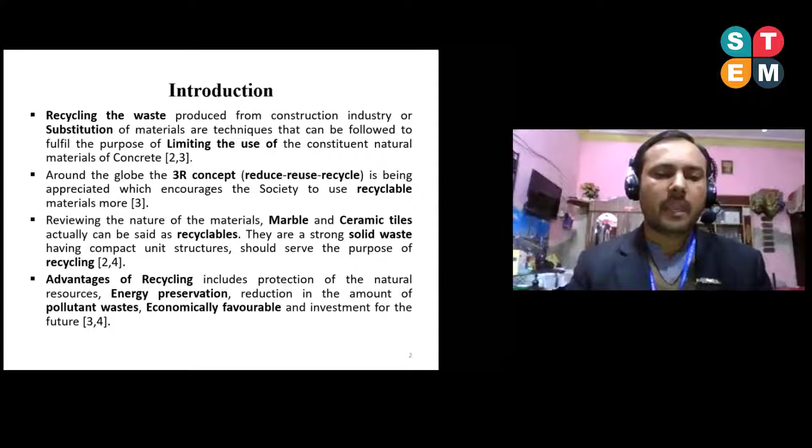Reviewing the nature of the material, marble and ceramic tile can be said to be recyclable materials. They are strong solid waste having a compact unit structure, which should serve the purpose of recycling. Advantages of recycling include protection of natural resources, energy preservation, reduction in the amount of pollutant waste, economic favorability, and investment for the future.

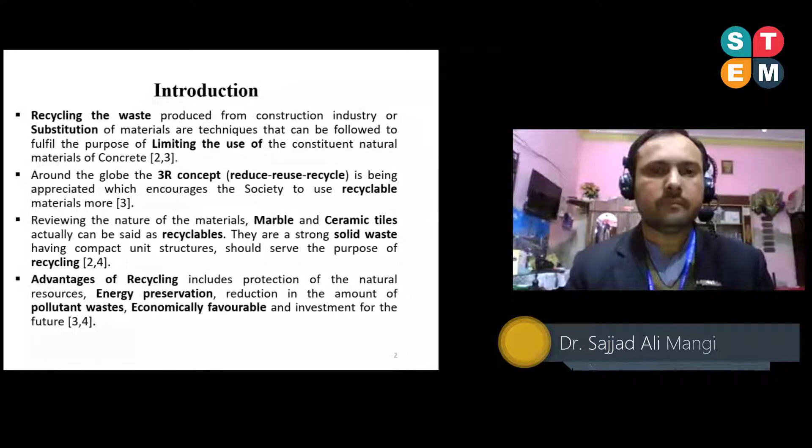What is waste marble? Waste marble is from one of the world's largest yields of natural stone, which is 50% of the total yield of natural stone around the globe. Particularly in Pakistan, Khyber Pakhtunkhwa province possesses huge marble reservoirs. 20 to 30% of marble blocks convert into powder or dust throughout its processing. This waste, on interaction with the soil, affects the soil properties and alters it negatively by making the land barren.

And what is ceramic tile? During ceramic tile production, studies have shown that about 30% of material turns into waste, and currently it is not beneficially utilized. Particularly, construction and demolition waste contributes the highest percentage of waste worldwide, around 75%. If tile aggregates are replaced with coarse aggregates in concrete, it yields very useful results, reduces pollution, and fits economically as well in the construction industry.

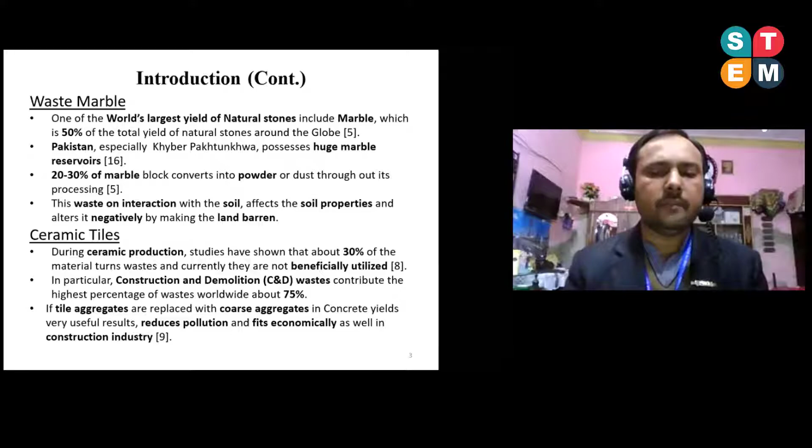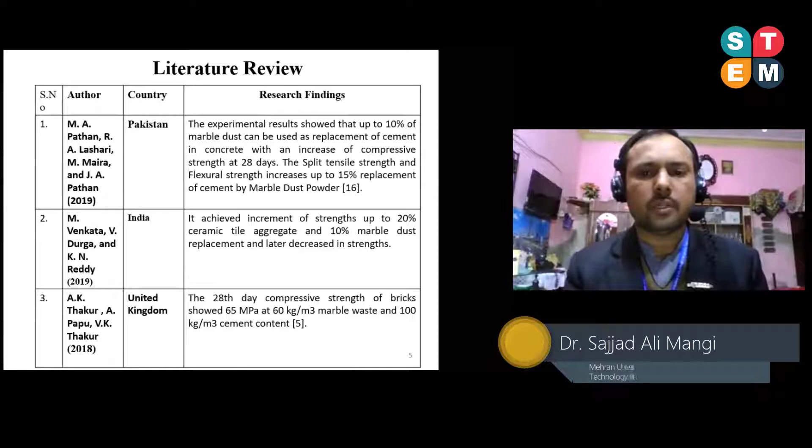This is the literature review which is already available, and there are many research studies conducted on waste marble and waste marble dust, and on tile waste. But there is no research reported which uses a combination of these two materials.

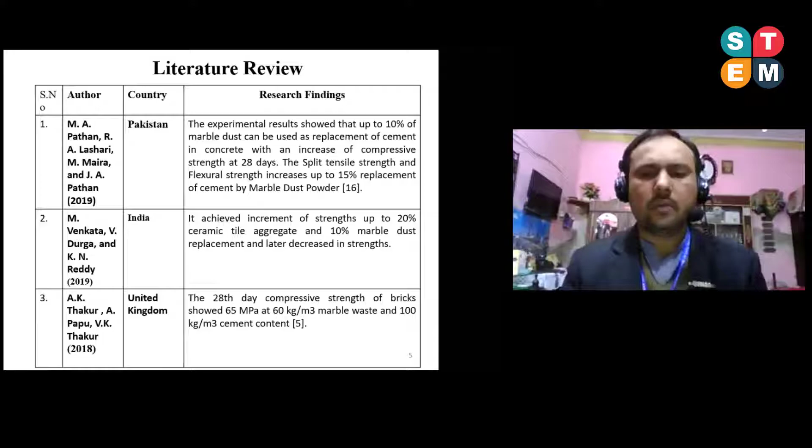In Pakistan in 2019, a research was conducted which shows that 10% is an optimum replacement. In India in 2019, research also shows 10% marble dust is optimum. A 2018 research in the United Kingdom also shows good strength performance with waste materials. A 2018 research in South Africa also reported that waste materials can be utilized and have a good impact on concrete strength.

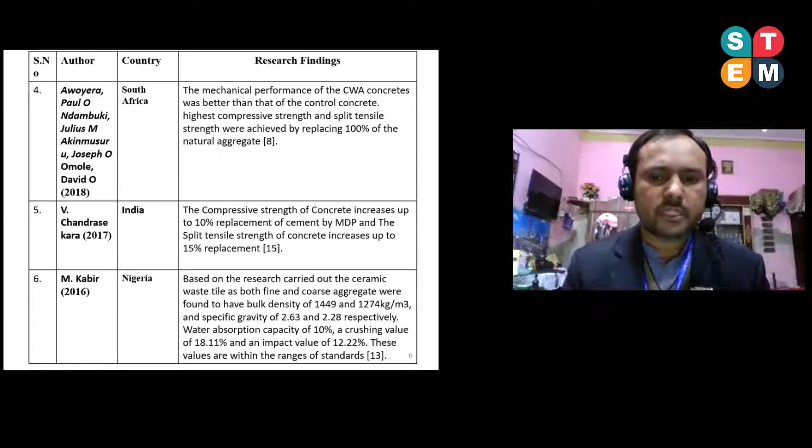Another research in India, reported in 2017, also shows that 10% replacement is optimum. And last but not least, research from Nigeria in 2016 also reported a 10% replacement optimum. So based on the previous research, this study was designed.

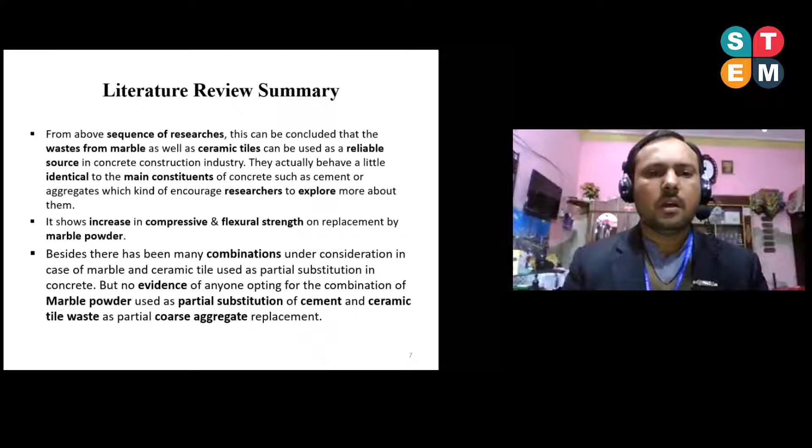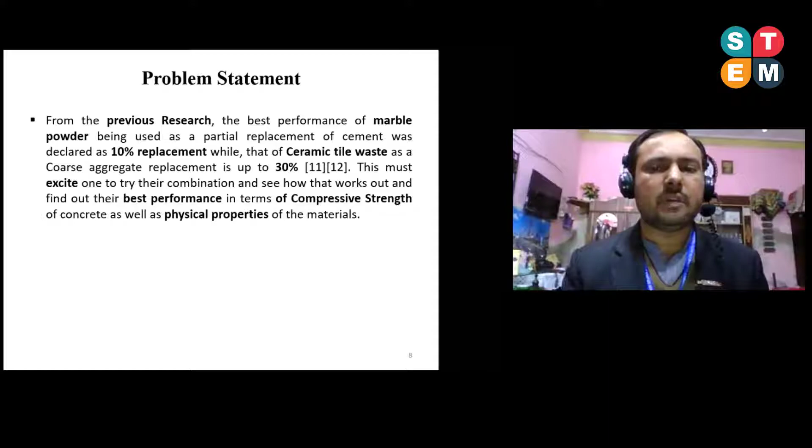What is the problem? From previous research, the best performance of marble powder used as a partial replacement of cement was declared at 10% replacement, while that of ceramic tile waste as a coarse aggregate replacement is up to 30%. This must excite one to try this combination and see how it works out, and find the best performance in terms of compressive strength of the concrete as well as the physical properties of the materials.

Based on the literature review and problem statement, the aims and objectives were designed. The aim of this study is to achieve sustainable and green concrete using waste materials like marble and tile.

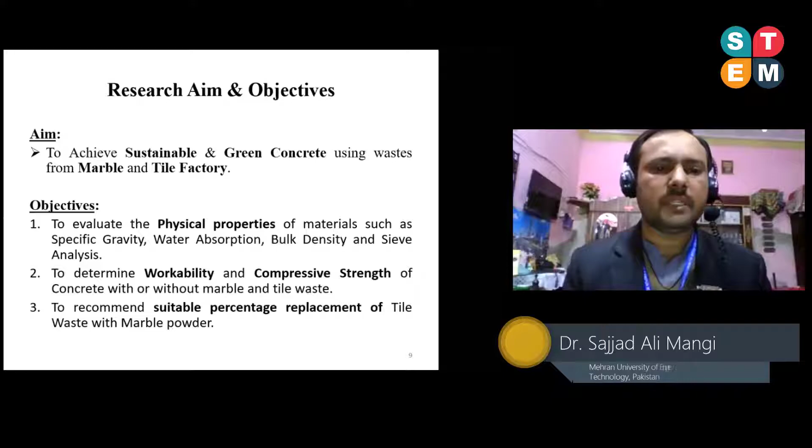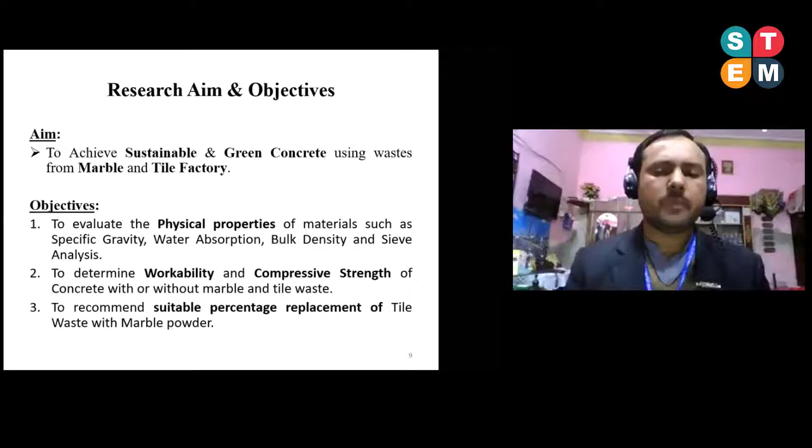Objective 1: to evaluate the physical properties of materials such as specific gravity, water absorption, bulk density, and sieve analysis. Objective 2: to determine the workability and compressive strength of concrete with and without marble. Objective 3: to recommend a suitable percentage replacement of tile waste with marble powder.

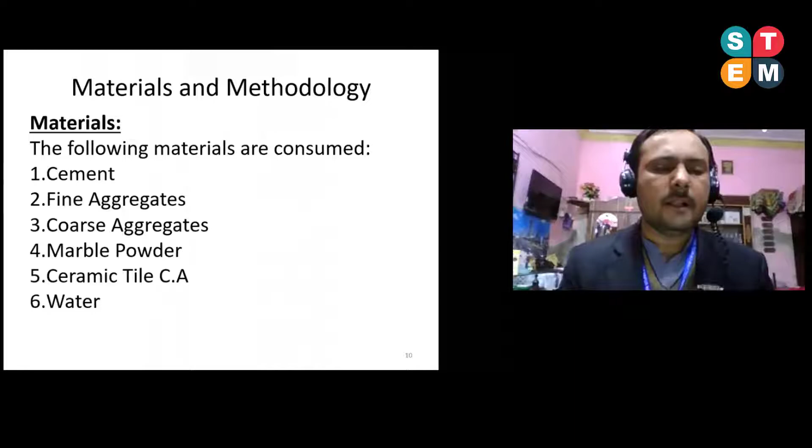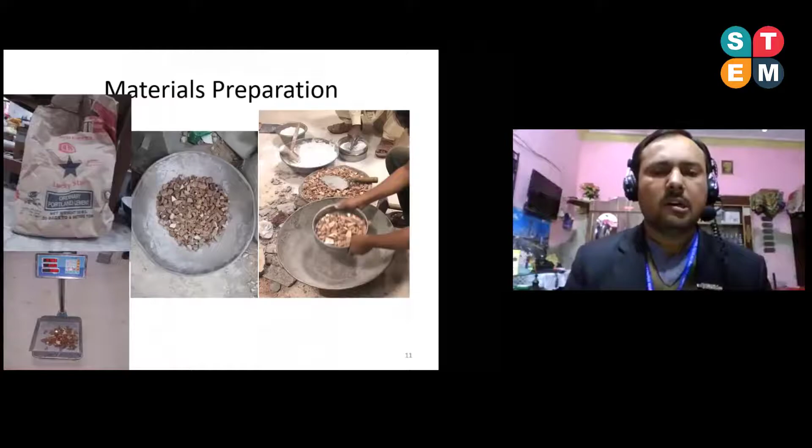Materials used during the experimental work: cement, fine aggregate, coarse aggregates, marble powder, ceramic tile as a coarse aggregate, and water. These are snapshots taken during the experimental work. You can see the tile waste, which is prepared like a coarse aggregate.

Equipment used during the experimental work: cylinders of size 150mm in diameter and 300mm in length, concrete mixer, slump cone, weight balance, hammer, electric vibrator, sieves, oven, and compressive test machine.

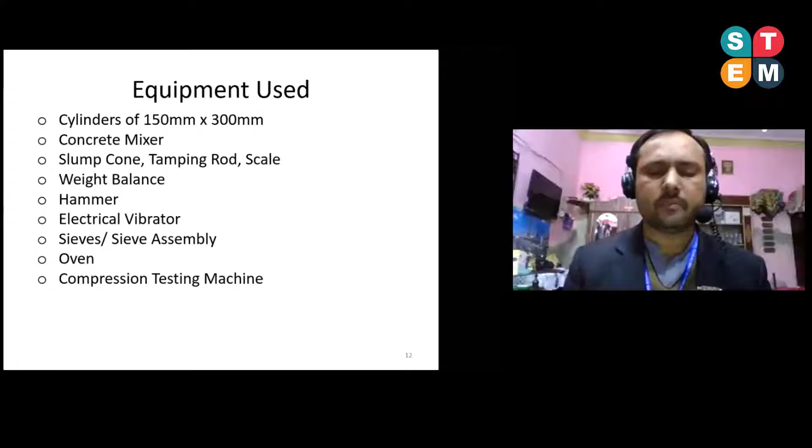Methodology: based on the literature review, we initially decided to combine these two waste materials - preparation of research strategy, selection and testing of suitable materials for the development strategy, and then preparation of samples, which were put in water for a designated period of time for curing.

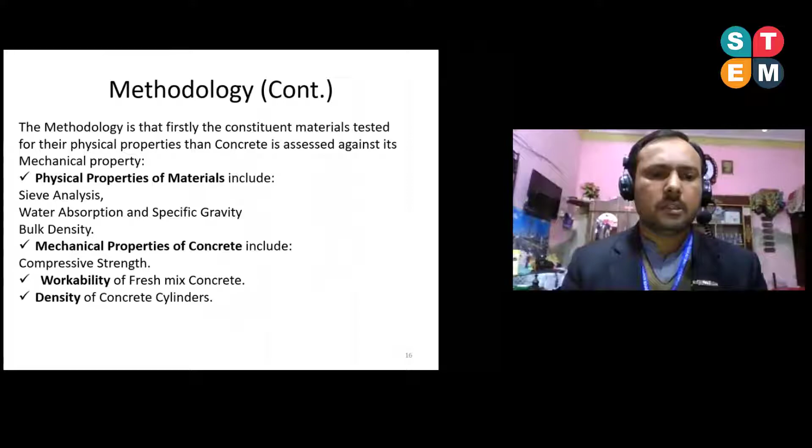These are the methodology details, and in this study we prepared around 24 samples. Here you can see there is some coding: C1, C2, C3, and C4. C1 represents the control mix, meaning without any waste material, which can be compared with the recyclable materials.

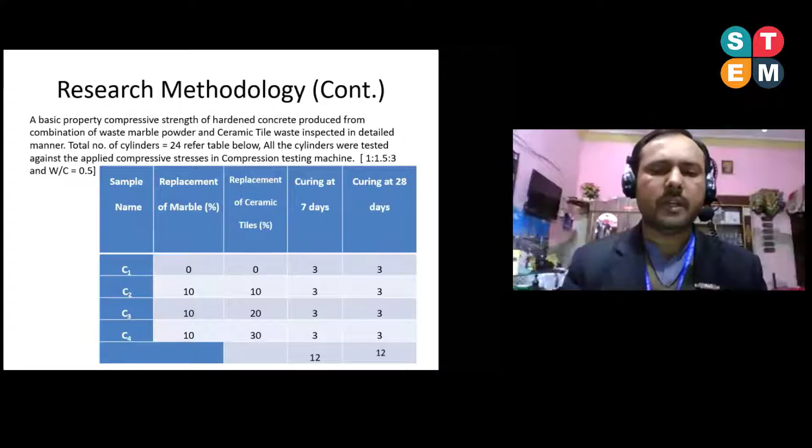C2 represents the 10% marble powder. In this study, we fixed the marble powder as a 10% replacement, then we vary the ceramic tile waste by 10%, 20%, and 30%. Three samples were prepared for each, with a total of 12 samples at 7 days and 12 samples at 28 days tested.

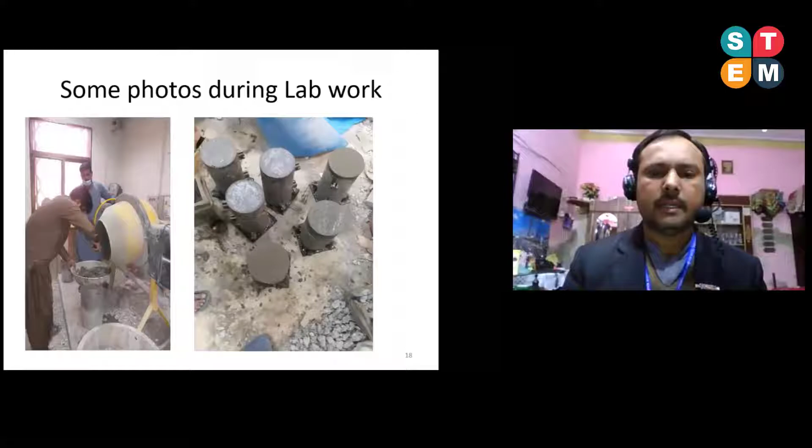These are some snapshots during the lab work, and these are the cylinders that were casted.

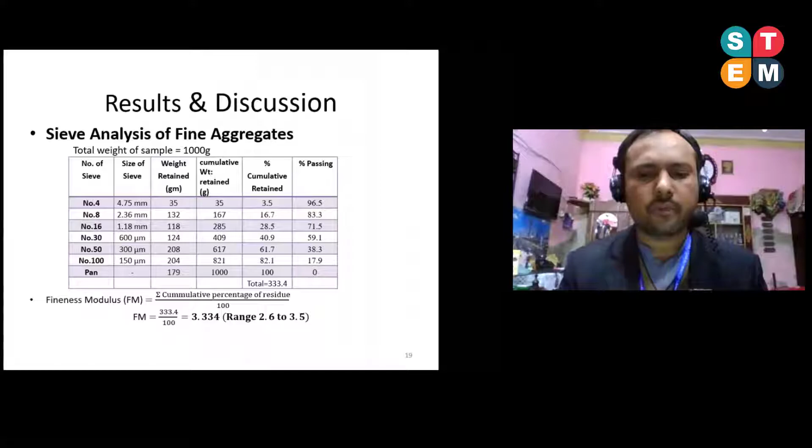These are some results of sieve analysis. According to British standards, these tests were conducted, and sieve analysis of fine aggregate was found quite good within the range of 2.6 to 3.5. The result of our fine aggregate is 3.33 fineness modulus. These are the sieve analysis results of coarse aggregate used in this study.

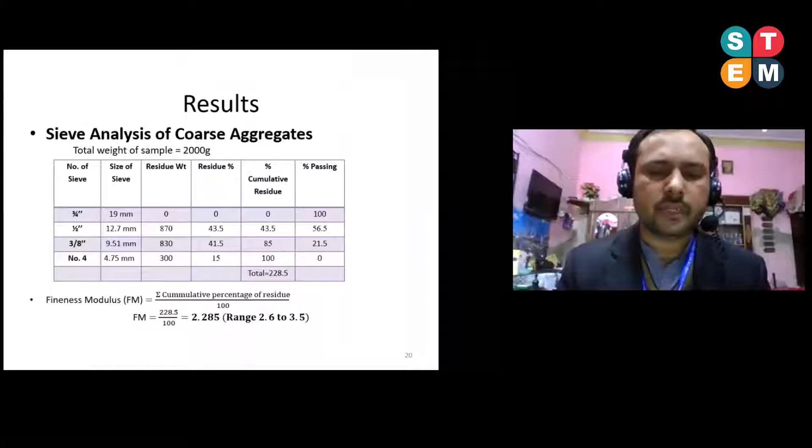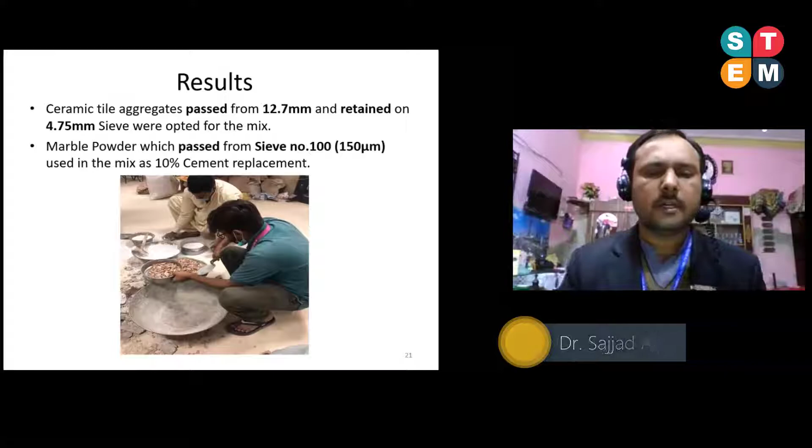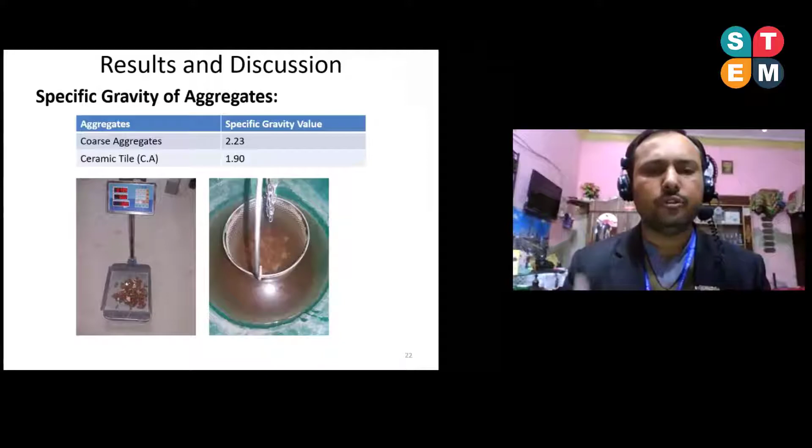These tests were conducted as a specific gravity test, and the specific gravity of coarse aggregate was found to be 2.23, and the specific gravity of ceramic tile was found to be 1.90. This shows that the specific gravity of ceramic tile coarse aggregate is lower than the actual coarse aggregate, which reflects that we can also produce lightweight concrete with ceramic tile.

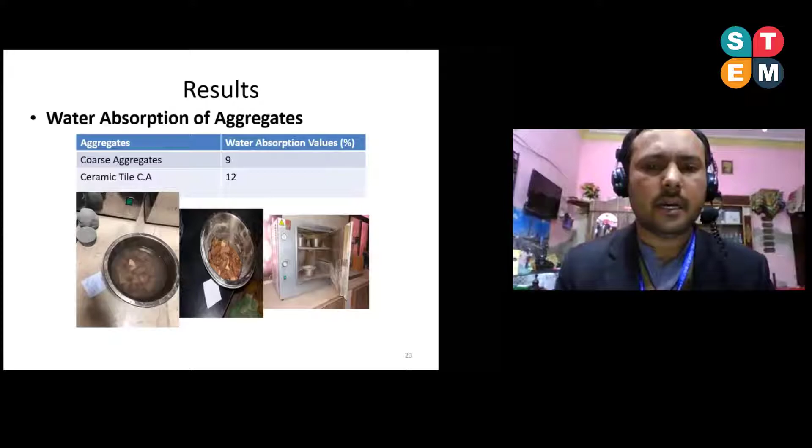These are some snapshots of the water absorption test. Here you can see the result of coarse aggregate is 9% water absorption, but in ceramic tile, the water absorption is quite higher compared to the natural aggregate, which is 12%.

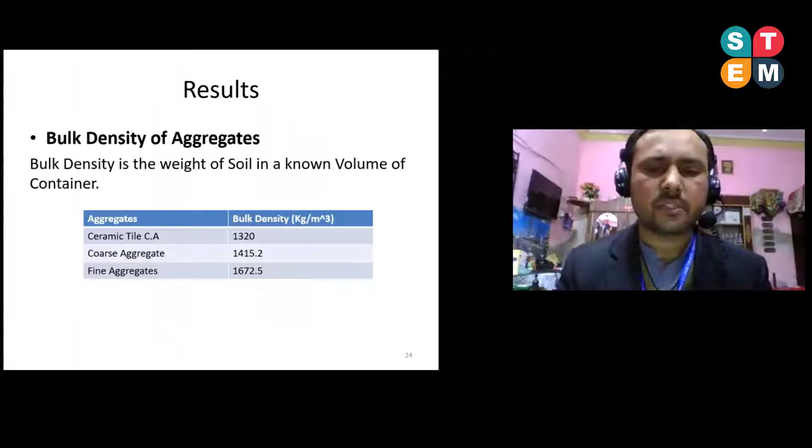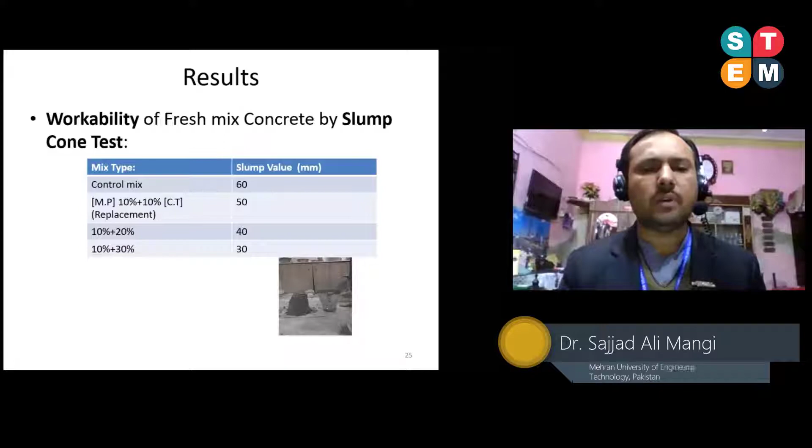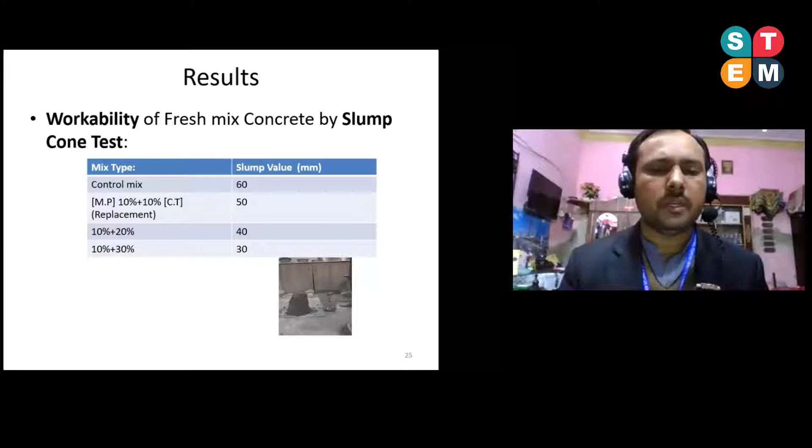This shows that when we increase the amount of waste material, the slump value decreases, because the waste material absorbs more of the water present in the mix. Due to that, the slump value decreases.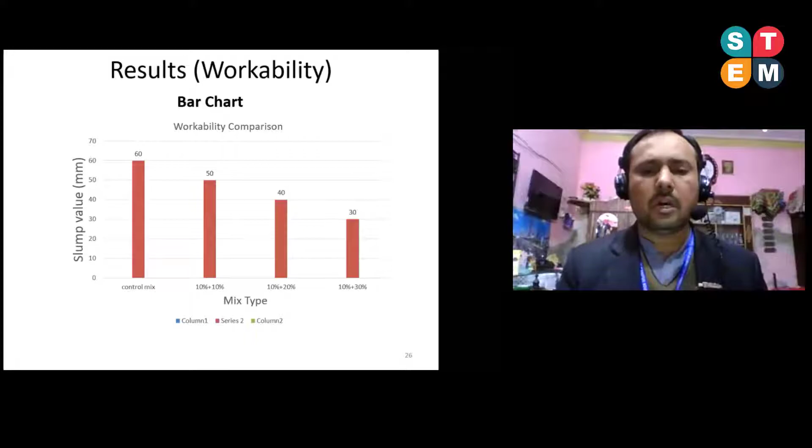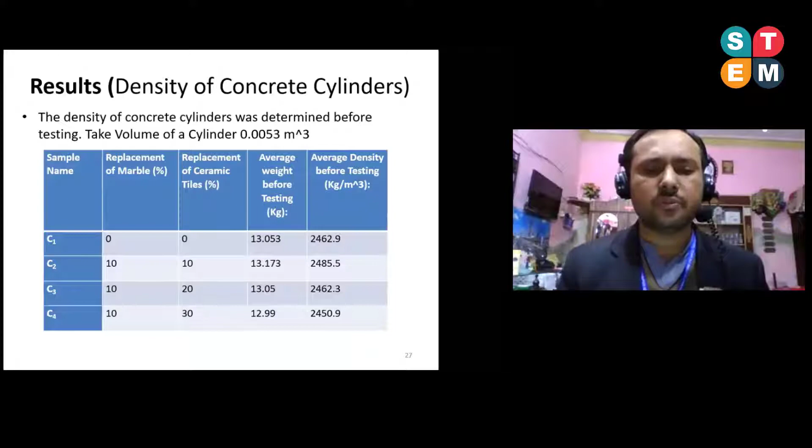These are some results of density, and density is almost near to the control mix. Here you can see C1 is 2462, C2 is 2485, C3 is 2462, and C4 is 2450. It's close to the control mixes.

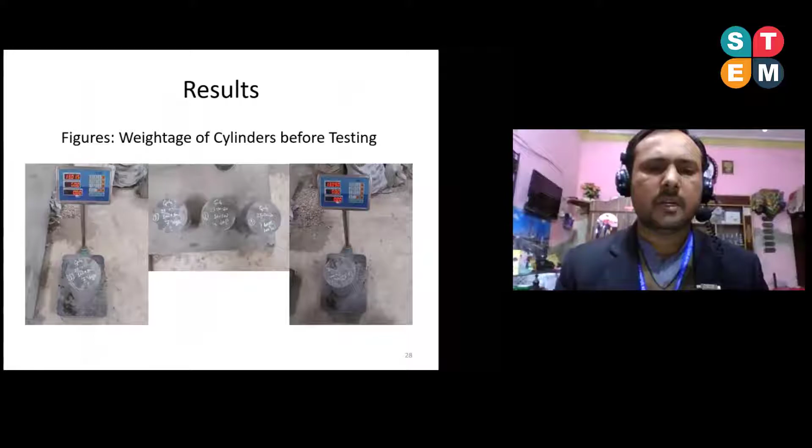These are some snapshots while taking the weight of the samples. These are the main results of the compressive strength test.

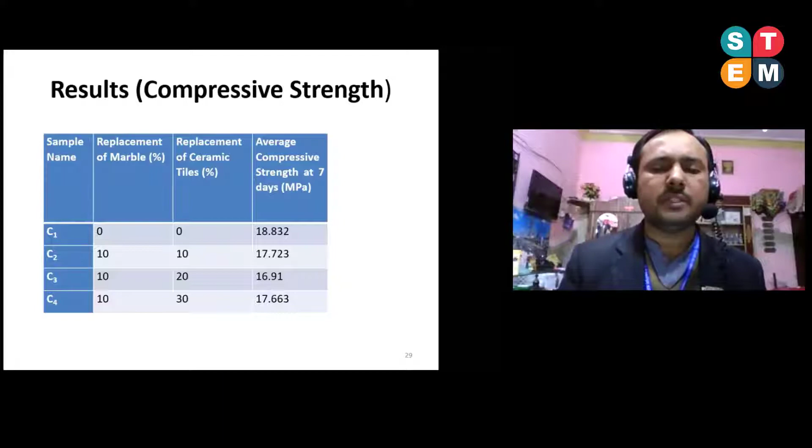C1 without any waste gives a compressive strength at the age of 7 days of 18.832 megapascal. C2 gives 17.72 megapascal, C3 gives 16.91 megapascal, and C4 gives 17.66 megapascal. At 7 days, the initial age of curing, it shows the strength decreases compared to the control mix.

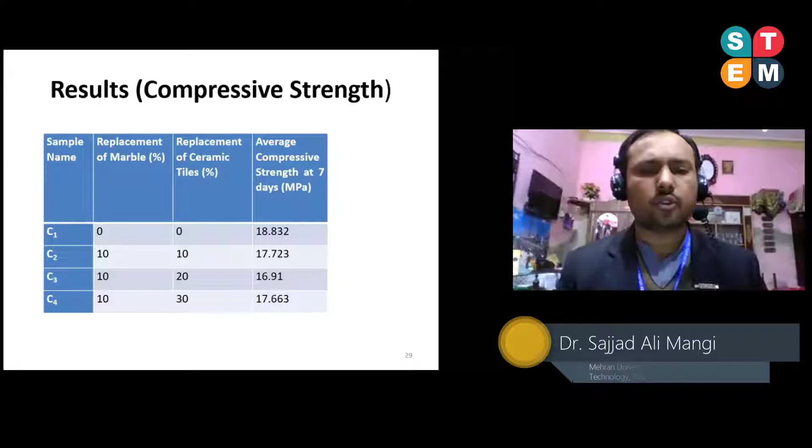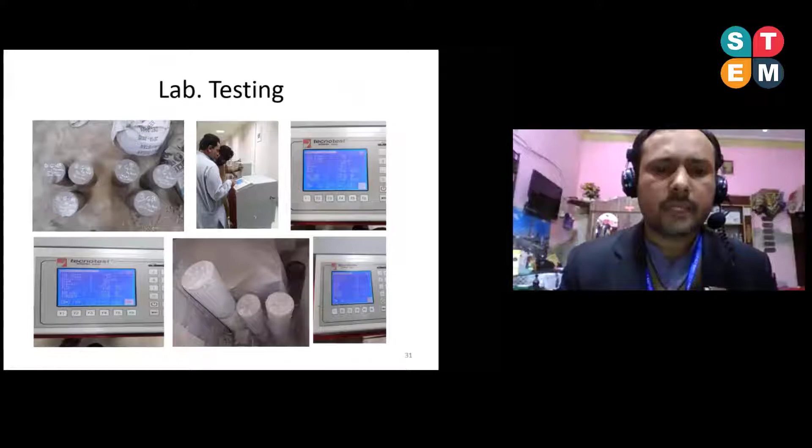In this study, the effect of using marble powder and ceramic tile waste on properties of concrete was studied, and it can be concluded that the compressive strength of concrete with replacement is approximately the same as conventional concrete. The workability of concrete with replacement decreases with increasing ratio of replacement, but compressive strength decreases only slightly, not by a huge amount.

Partially substituted concrete at the ratio of 10 plus 10 performs better than other replacement ratios. This study recommends 10% marble powder and 10% ceramic tile as the optimum combination.

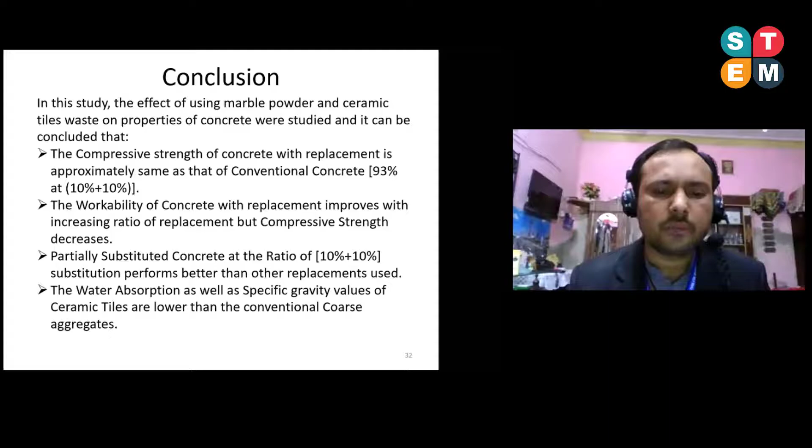The water absorption as well as the specific gravity values of ceramic tile are lower than the conventional coarse aggregate. So these are some recommendations.

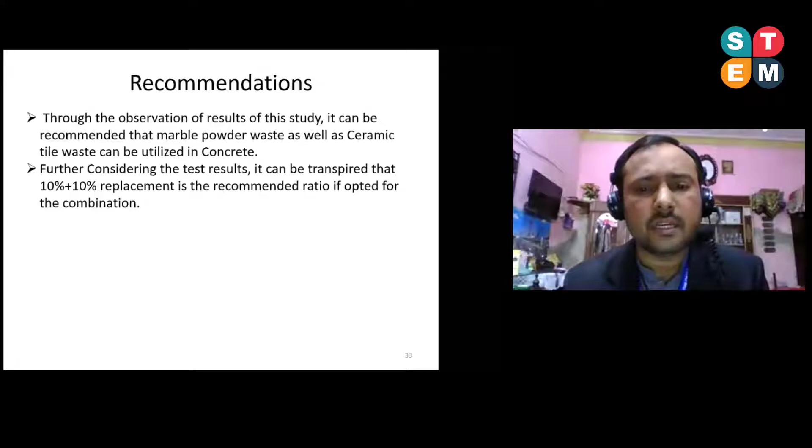Through the experimental observations and based on the results, this study recommends that marble powder waste as well as ceramic tile waste can be utilized in concrete. Considering the best results, it can be concluded that the 10% marble powder and 10% ceramic tile replacement is the recommended ratio for the combination.